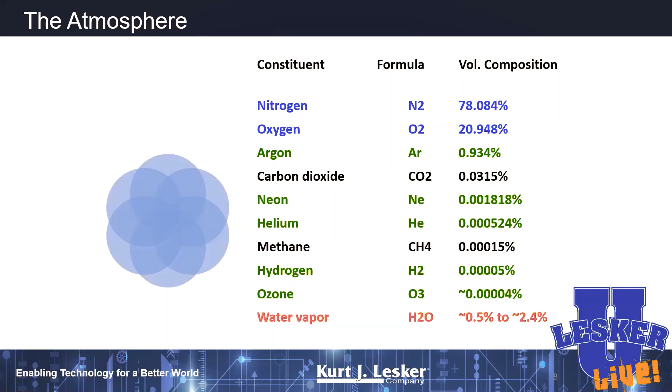These molecules are moving at really high speeds, measured in meters per second. Nitrogen moves around 475 meters per second, helium over 1,000 meters per second, hydrogen on its way to 2,000 meters per second. These things are really flying along. If we had a chance to talk about vacuum pumps, I'd show you how some of your vacuum pumps are specifically designed to match the speeds of some of these pesky molecules.

There's really no negative pressures in our environment. At atmosphere, we've got our 24 quintillion molecules per cc. As we go down in pressure, as our vacuum systems literally claw these molecules out, we go down and down in molecular density. We get down to ultra high vacuum, the edge of it, maybe we still have something like 325,000 molecules per cubic centimeter. You get out to 10 to the minus 12 torr, the lowest possible pressure you can achieve on this planet, and using every heroic means I can describe, you still have something like 32,000 molecules per cc.

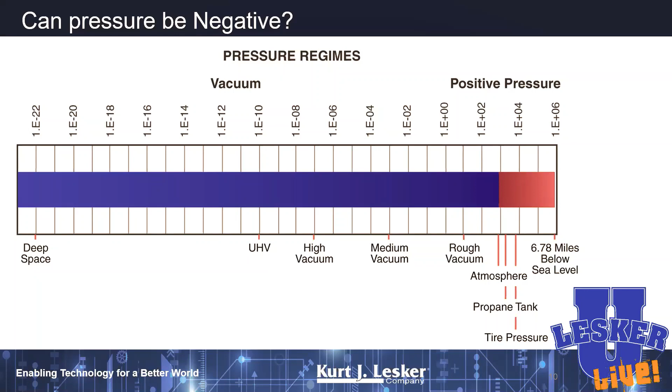Even if you get out into deep space, away from Earth and Mars and planets that are still losing their atmosphere, you still have something like 4 to 5 atoms of hydrogen per cubic meter — not cc's anymore, now we're talking cubic meters. So you still have a few little molecules floating around. Atomic oxygen or atomic hydrogen is pretty aggressive too, so it's a pretty nasty environment out there in deep space.

I just want to take a quick moment to remind you all about this thing called mean free path. When I say mean free path, I mean the average distance that one molecule has to go before it collides with another molecule. So you can imagine up at atmospheric pressure, at 760 torr, when we have our 24 quintillion molecules per cc, that mean free path is a pretty tiny number.

But as we go down in pressure, as our vacuum pumps literally claw these molecules out of the system, we get down to what your dry scroll pumps or maybe your rotary vane pumps will do, and that mean free path starts to open up. Maybe it's a couple of inches.

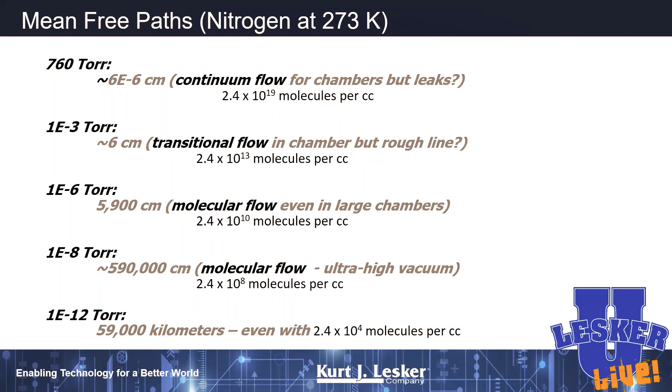We get down into ultra high vacuum, maybe the base pressure we can achieve on this planet using every heroic measure I can describe. These are the pressures that your particle accelerators operate at, and now your mean free path is an enormous number. At those kinds of mean free paths, you've got some right to expect you can take one molecule up to the speed of light and crash it into the path of another molecule without it getting knocked off course.

All right, enough of fundamental vacuum. So when we talk about making films now, again, we're talking about some kind of a technique where we're going to transfer some kind of a solid, typically, into a vapor.

With thermal and e-beam evaporation, we're going to do it with heat. With sputtering, we're going to do it with collisions of ions of some kind of an inert gas like argon, or I'll show you some data on krypton.

We're going to take that vapor, hoping it's going to go across a throw distance and land on a solid surface. We're hoping that once it gets on the solid surface, it's going to start to nucleate into some kind of a structure. A film is going to grow there, and hopefully the film is going to have the properties that we want. And if it doesn't, hopefully there's going to be some kind of a post-deposition process we can do to get you what you need.

There's a blank slide just for notes.

Again, when we talk about these thin film deposition processes, you typically start out with a substrate. The substrate is clean, it's pristine, it's never been touched by human hands. I'm sure none of you have ever touched anything going into a vacuum chamber with your bare hands. That's an absolute no-no. You can never touch anything going into a vacuum chamber with an ungloved hand. One fingerprint has got about the same number of molecules in it as a cc of air at atmosphere.

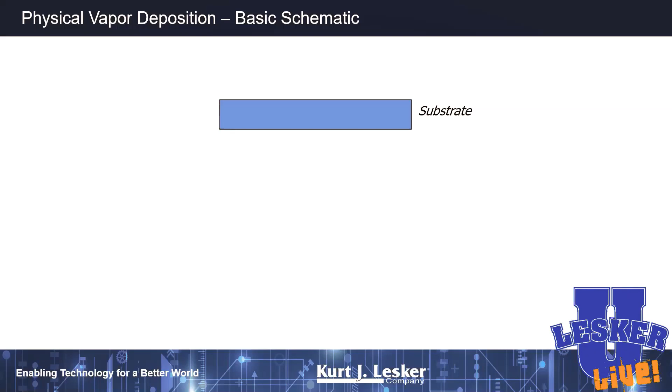All right, so we've got our absolutely clean, pristine substrate. We may want to temperature control the thing, heat it or cool it, depending on what kind of morphology we're trying to develop. As we talk about thin film growth models later on, I'll show you some examples of what we can do if we heat our substrates. When we heat our substrates, we're essentially adding energy to the ad-atoms arriving at our substrate, helping them form a more dense, more smooth film.

We've got some kind of a throw distance between the substrate and our source, and the source can be your evaporation pellets or your sputter target. We're going to develop some kind of a flux from that source. Again, with thermal evaporation, we'll do it with heat. With sputtering, we'll do it with collisions of argon ions, for example, and hopefully we'll get a film, and hopefully that film will have the properties that you want.

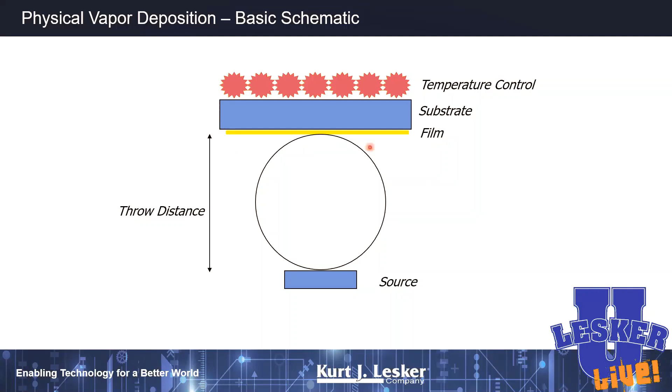And if it doesn't, hopefully there's some post-deposition process that we can do to get your film to do exactly what you need, like stick to your substrate.

You've got to have a vacuum system which is designed correctly, where you can get to the pressures that you need to. It may have load locks if you're trying to get into some ultra high vacuum routinely. You might need to have the right kind of pumps. You may have a process that's sensitive to hydrocarbon pump oil vapors, so you've got to use dry scroll pumps instead of rotary vanes.

Then you've got to have a process that works. You've got to have the right current and voltage combinations. If you're doing thermal evaporation, you've got to be at the right base pressure, and I'll show you how different base pressures will affect the morphology of your film. You've got to be mindful about the chemical purity of your source material.

And then you've got some fundamental parameters, things which are going to be really a function of the type of process that you've chosen to deposit your films. Based on the process, your ad-atoms are going to have a certain amount of energy, which may or may not be sufficient for what you're trying to do. I'll show you some data on flux densities in terms of things like deposition rate—the angle at which these fluxes actually impact your substrate is critical, and you have a little bit of influence over things like that.

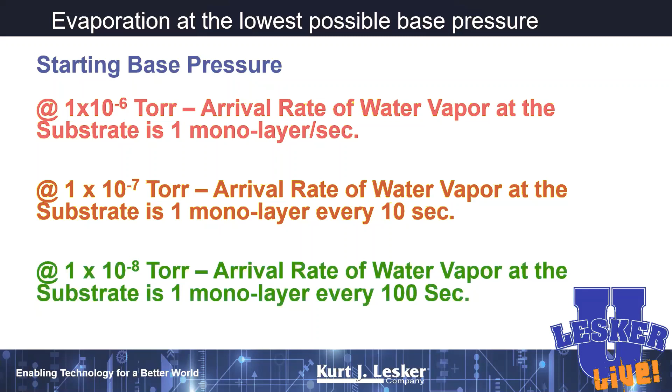Let me show you some examples here. I have one of the great jobs in the world - I get to travel the entire planet and give lectures to wonderful groups like yours. I teach a lot at national labs and military labs, and with a lot of industrial customers, and one of the groups I work with a lot are the groups doing automotive lighting - the people that do headlights and taillights for your cars, buses, and motorcycles. That group should be pretty much interested in reflectivity.

If you do it right, you can get almost 100% reflectivity. But your car people are too cheap to use silver, so they use aluminum. For those of you who've deposited aluminum films, you know it's a horrible material - it just really doesn't want to be aluminum metal. It wants to be aluminum oxide or aluminum nitride. It's just a real pain. So if you've got any extra oxygen in your system, you are immediately going to crush the reflectivity of your aluminum films. You'll go from 85% reflectivity for a pristine film down close to 70% for a film with a lot of oxygen in it.

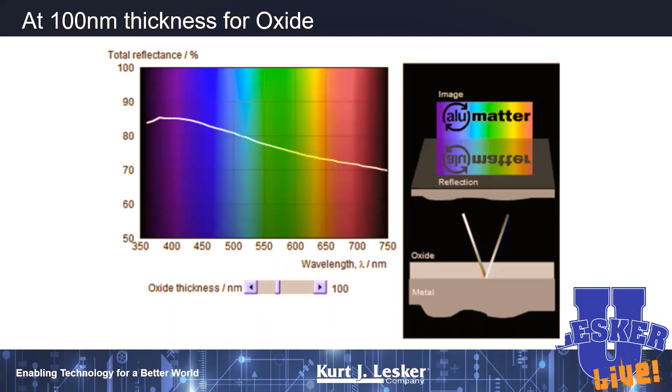Why is that? If you look at what automotive lighting guys do, an automotive lighting manufacturer will make 250,000 pairs of headlights a month. So these guys are really built for speed - they're not built for reflectivity.

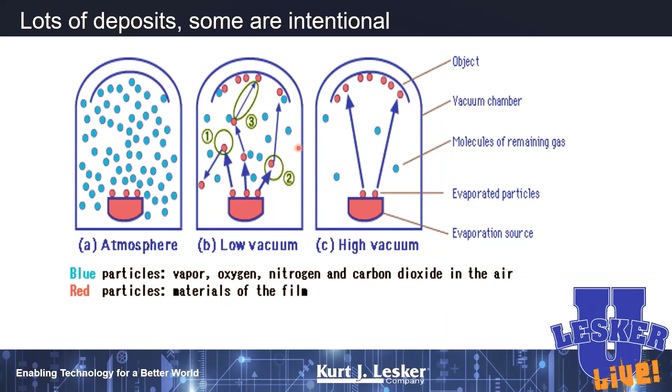Most of your automotive lighting manufacturers are doing their depositions about in here, and that's why a lot of these films are pretty junky.

Here's a really simplified cartoon for a thermal evaporation system - this is about the most simple system you'll work with in your careers. Your material sits down here in a boat or a crucible. There's a power supply, which I'm not showing you, but its parameters are critical - you've got to know the voltage and amperage it can deliver in order to determine what materials you can actually evaporate. Anyway, your materials are down here.

Your substrates are typically up high. Generally speaking, we're going to evaporate up. I'll show you a boat here in a minute where we can evaporate down, but it's fairly complicated. Hopefully your substrate's on some kind of a manipulator so we can actually move it through the vapor plume we're going to develop here.

This chamber can be at the lowest possible pressure that you can achieve. So 10 to the minus 8 torr is not a bad number for a thermal or e-beam evaporation system. You do not need a process gas. The lower in pressure you can get this system, the more pristine the films you're going to make. You'll have fewer gas inclusions, fewer stacking errors and things like that. So again, think clean, pristine, lowest possible pressure you can achieve.

You're typically going to have a quartz crystal microbalance, so you can measure deposition rate in real time, and obviously we're going to want to measure pressure. Because if you want to make two films that are identical, they've got to both be done at the same base pressure. If you don't get to that same pressure, you're going to make really horrible films. Again, I'm not showing you the vacuum system that goes along with this.

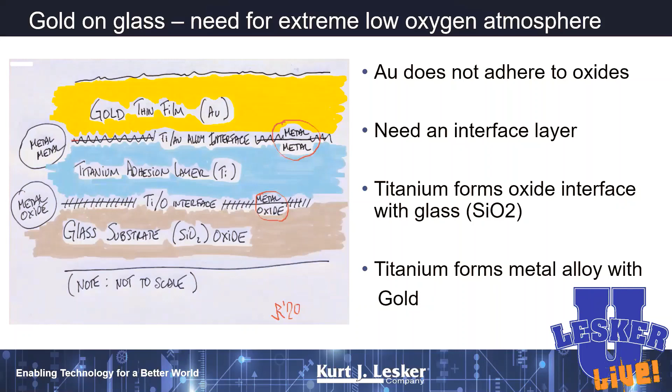Now, if you have to break vacuum and expose your titanium to the atmosphere, you're going to have a titanium oxide layer here, and your gold won't stick to that. So just be really, really mindful when you're trying to put metals on things. Certainly gold does not want to stick to oxides, and so you've got to have a nicely sophisticated system to do that.

When I talk about thermal evaporation or evaporation at all, it's about vaporizing the material. Thermal and e-beam evaporation is really not about melting the material. We're interested in the melting temperature because it's going to have some effect on how the material is going to react with our boats, but we're really not intentionally trying to melt anything if we can get away with it.

And evaporation and sublimation are different. Evaporation we're going to do with heat. Sublimation we can just do with pressure. I'll show you some charts in a couple of seconds where we can just sublime something if we want to make a film out of it.

If you look down inside the system, again, this is a brand new system, so it's clean, it's pristine, it's never been used before. This is a 3-boat system. So we have a boat here, we've got a boat here, we have another boat here. The boats are typically made out of refractory metals like tantalum, tungsten, or molybdenum. There's a little indentation in the center of the boat, and that's where we're going to put our materials to evaporate.

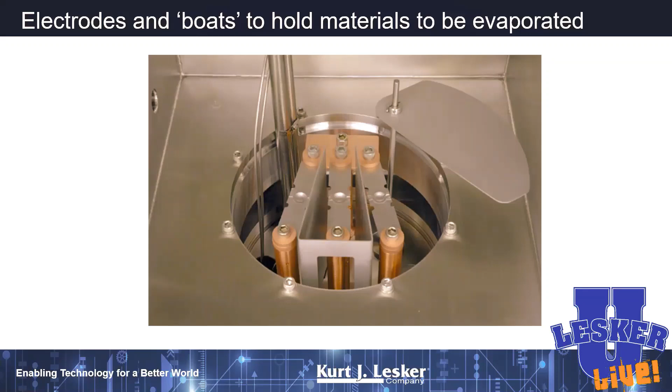This system is set up with a shutter so I can swing it over the top of the boats and preheat my source material, trying to desorb off any water on the material and burn off any fingerprints some incompetent technician left on it before evaporation. This is widely used in industry.

You've got lots of options on thermal evaporation boats, with lots of different geometries to affect the shape of the flux coming off them. As I mentioned before, we have to be really mindful of the voltage and amperage of our power supply, because that completely dictates the suite of materials we can make by thermal evaporation.

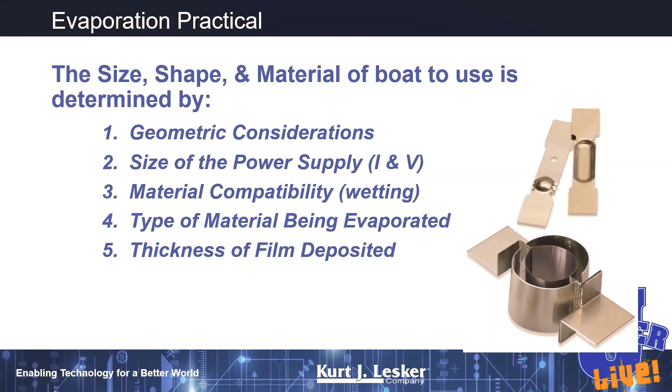We also need to be mindful about compatibility with the boat material for whatever you're evaporating - I'll show some recommendations in a minute - and you need to be mindful of the thickness of the film you're trying to deposit. These boats I showed you are great for relatively thin films, since you can't put much material in them.

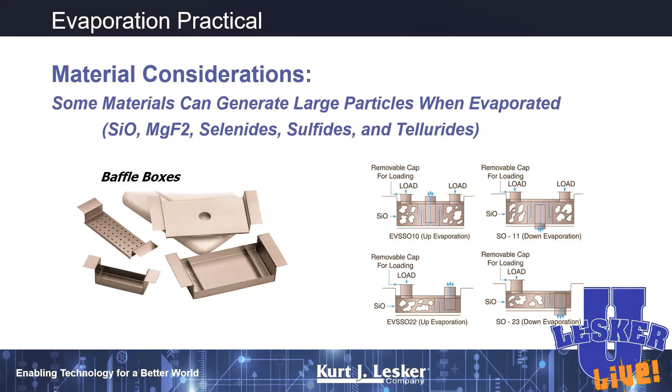You can evaporate from rods by putting coils in there in our systems. If you need to evaporate downward, for example if your substrate needs to be coated below the source material, there are fairly sophisticated boats that evaporate down. If your material spits a lot, you can use a baffle box, where the material sits in a box covered by a shield to mitigate big clumps spitting out at your substrates.

Crucibles can be made of materials like aluminum oxide, silicon dioxide, pyrolytic graphite, metals like tungsten or copper, or boron nitride if you don't want your material to stick very much.

Hang on a second, my dog wants a cookie here. Hang on... all right, there you go. All right, the dog's happy for another few minutes.

Very clever. So again, there's going to be some things that you can do by thermal evaporation here, low temperature stuff, or the boats that I showed you, the tantalum, the molybdenum, the tungsten boats. For other things like refractory metals, if you've got something that goes off at very high temperatures like platinum, tungsten, titanium, things like that, we may be better off doing those by an E-beam. I'll show you some data on that in a second.

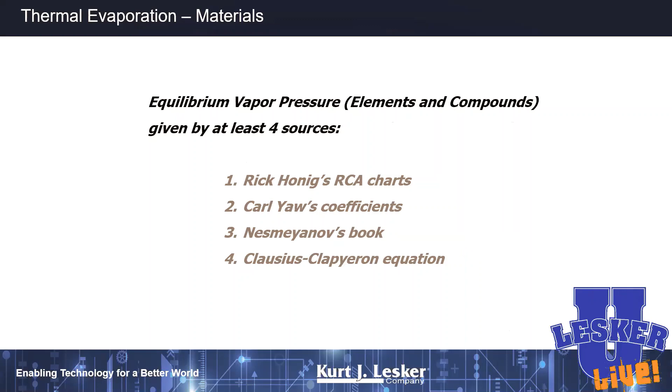Now, if we're trying to get to that number, what temperature do we need to get to that equilibrium vapor pressure we want? I'll show you some of Rick Honig's wonderful charts that he developed when he was at the Radio Corporation of America. There are some other places we can look these things up, and we can actually calculate them using equations if we like to do the math. I'm typically too lazy to do stuff like that. If you just want to look it up, again, these are...

That means the zinc will likely not attack our boats. We won't get some sort of violent reaction between the zinc metal, for example, and our tungsten boat. As I mentioned, typically for thermal and E-beam evaporation, you want a vapor pressure somewhere in the 10 to the minus 2 to 10 to the minus 4 range. Much below 10 to the minus 4, you're not going to be able to read much of a deposition rate on your quartz crystal microbalance. So think about being in this range.

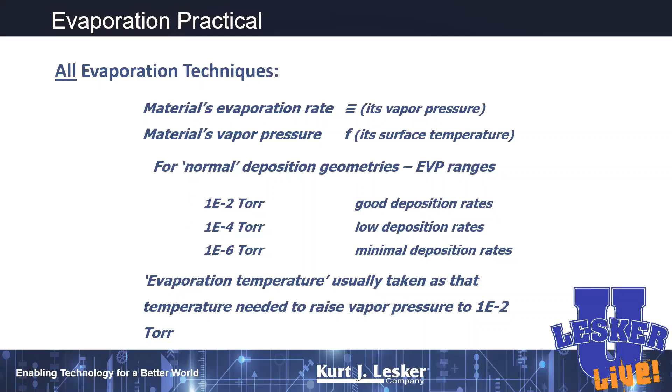So the aluminum is going to be molten. It's going to be very aggressive. It's going to try to drill holes through your boats or your crucibles. Aluminum is just really a nasty material to work with.

We've got a guy on staff named Rob Bellin, and he's a really walking book of useful knowledge on e-beam and thermal evaporation, and he provided me with a couple of tips here for the materials you're working with. In terms of trying to choose a boat to use, Rob's suggesting tungsten and tantalum for things that are going to sublime.

For things that are going to melt, that's just a nightmare. If you've got molten material in your chamber, it's really, really risky. Copper's not such a bad actor for things like that. If you want to deposit gold, palladium, or nickel, there's boats out there coated with a ceramic, aluminum oxide, to try to keep these metals from attacking your boat. If you're trying to do titanium, Rob suggested you just use something cheap, because you're going to be throwing it away about every application.

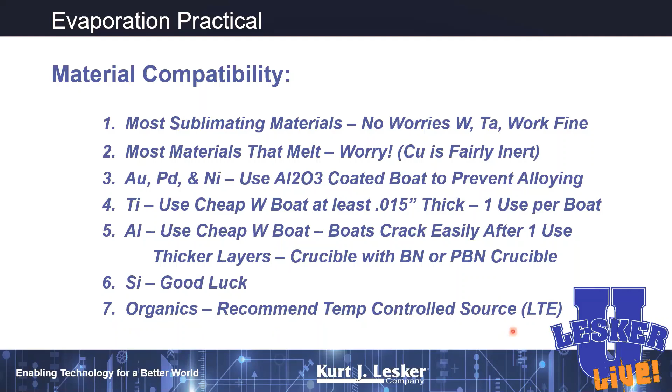Now, we have tried to summarize all this stuff for you. We have a thing called the materials deposition chart, available on our website. If you want a hard copy, let me know, send me an email, or send Nate or one of your contacts at the university an email, and we'll send you either a lab notebook that has this chart in it, or a big wall poster. If you've got a big crack in your wall you're trying to cover up, the wall poster is pretty handy for that. But what we tried to do is take all of the deposition information we have for oxides, nitrides, selenides, sulfides, all this stuff, and put it into one big chart for you.

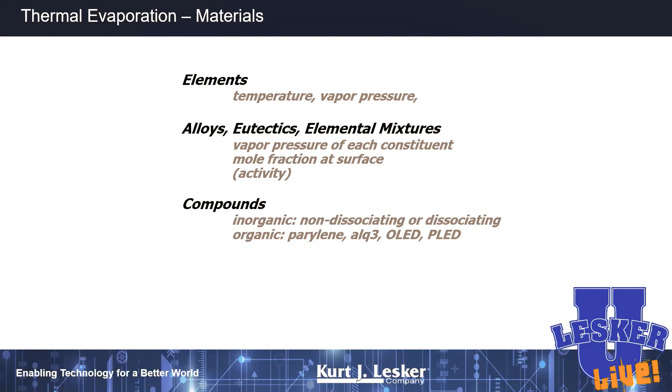I mentioned base pressure—that's just really critical. You've got to know what base pressure your system can get to. The lower in pressure you can go, the more pristine the films are that you're going to make. If you want to make two films that are identical in two different depositions, you've got to be able to get back to that same base pressure every time. So it's really critical that you know the pressure your system can get to, and that you keep your system clean and pristine, and don't ever get in there with your bare hands and leave a fingerprint. A fingerprint can cost you a decade on pressure.

And certainly, if you're working with reactive materials like aluminum or niobium or titanium, if you've got any extra oxygen in your system, you won't form the metal that you want. You'll form some kind of an oxide.

Now, we always recommend that you do some kind of a ramp and soak procedure when you're trying to do a thermal or E-beam evaporation. You've got an initial ramp and soak up to a temperature hot enough that you can desorb all the water and fingerprints and junk off your system. Maybe you do this with your shutters closed, and then a second ramp and soak, maybe with your shutters open, where you're trying to look at your quartz crystal microbalance and see how your deposition rate is increasing, and then a final short ramp up to the desired rate that you need.

Again, you never want to use more power than you need. There's no reason to go to a deposition rate or an equilibrium vapor pressure over 10 to the minus 2 torr. You will not like the morphologies of the films that you get.

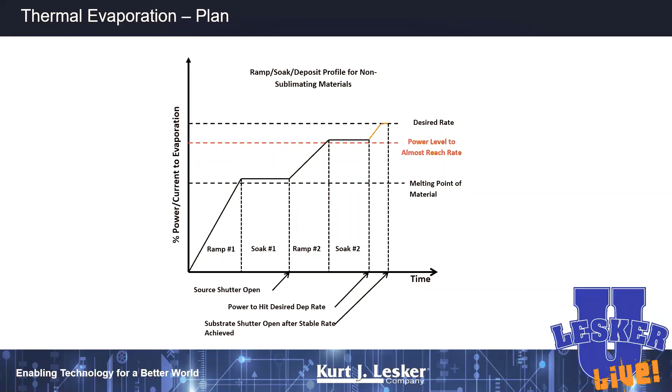We do recommend calibration runs. So if you're starting over with a new boat, or starting over with a new material, you do a calibration run—something onto a microscope slide, not onto your precious substrates—just so you can look for melting temperatures, and look for reactions between the material you're depositing and the boat.

It'll let you set the tooling factor for your quartz crystal microbalance. Again, your quartz crystal microbalance needs to be educated about what material you're using, and by doing a calibration run, you can generate this thing called a tooling factor. I don't have time to go into that just yet, but your quartz crystal microbalance is going to have some kind of a readout on the control panel for your system.

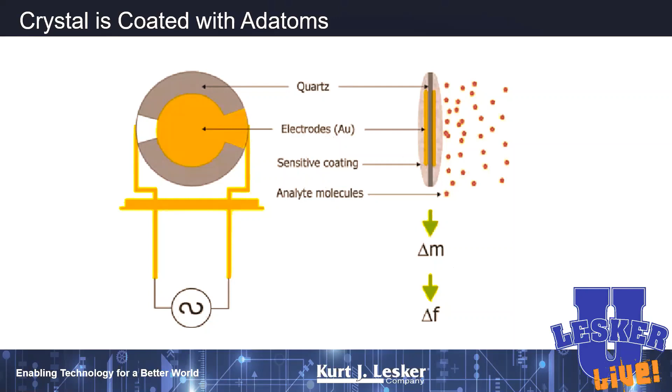The quartz crystal sits down in a water-cooled holder in order to keep that crystal at the same temperature. As you deposit material, the crystal has got a natural vibration that it does, and as you deposit material on it, you're going to change that vibration, change that frequency, and we use that change in frequency as our proxy for deposition rate. As we deposit more material on it, you can see that frequency is going to just drop and drop and drop, and we use that change in frequency as our proxy for deposition on the films.

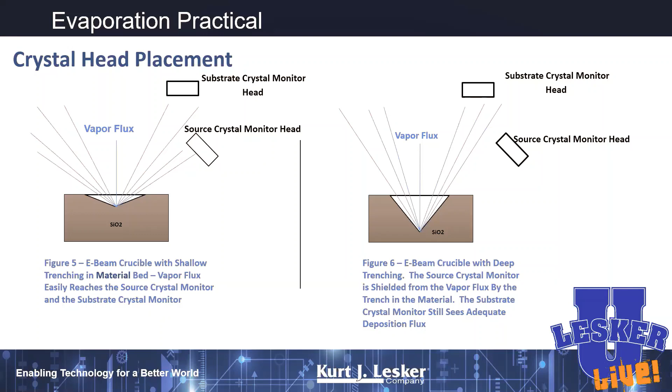Now, I mentioned film thickness. Obviously, before you make a film, you should know how thick the film is that you're trying to make. I love thermal evaporation because it's really the most material efficient technique we have to make a thin film, so that if we know the source to substrate distance, we can use that to calculate the area of a hemisphere, and do some math there to figure out exactly how much material to put in our system.

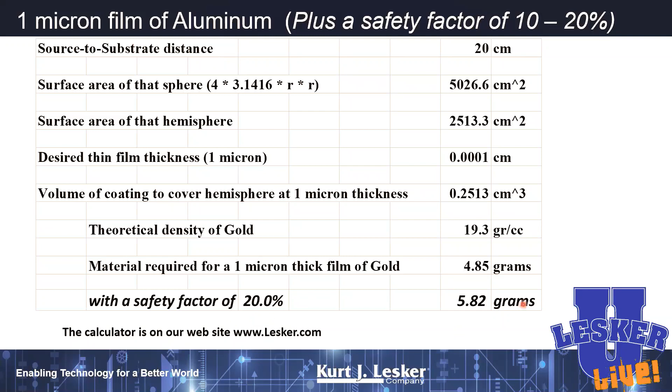So if you go into the website and go to evaporation materials, this calculator will pop up, and it'll let you input the source to substrate distance. You can either tell it you're doing gold, or you can type in the theoretical density of the material if it's not already on our list. And it'll prompt you for a safety factor, so you can go without it if you're feeling pretty courageous, or you can put in 10% or 20%, and it'll actually calculate how many grams you need to do that deposition.

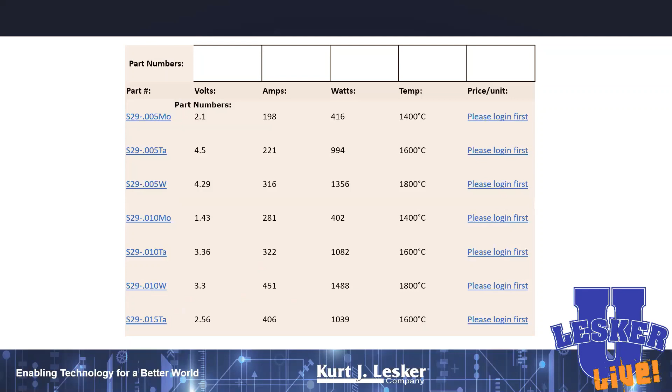Just to wrap up on thermal, again, we're going to use these wonderful refractory metal boats. We can use crucibles if we want to, lots of options there. Generally speaking, we're going to evaporate up. I want you to know the parameters of your power supply so you can know what materials, what temperatures you can get to. In terms of chamber pressure, I want you to go as low as you can possibly go, so I put 10 to the minus 8 torr in there. Hopefully your systems will go to that pressure. But whatever pressure you can go to, make sure you can get to that same number over and over and over again.

The thermal load on your substrates can be high if you're depositing for long periods of time. I'll show you some examples of that in a little bit.

Now let me talk quickly about E-beam evaporation. Most of the comments I made about thermal will apply to E-beam, but there'll be a couple other things I need to point out here. Just know that E-beam evaporation may be one of the more complicated techniques out there that you'll ever use. There's lots of black art going on there. I highly encourage you to send questions to us if you're going to do E-beam for a material that you don't have a process for. We've got lots of experience there.

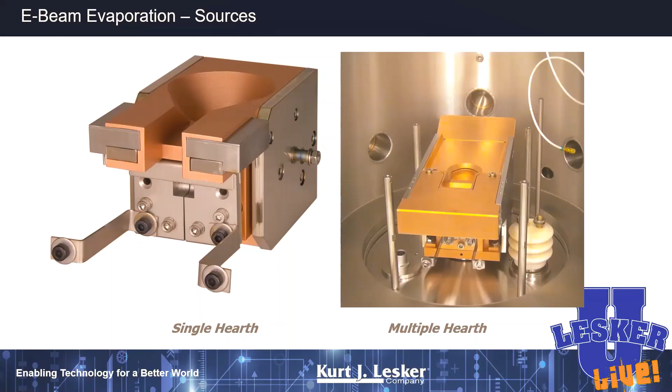Again, used widely in industry. Most of your optical lenses are coated by E-beam deposition with maybe an ion support or an ion assist. Your thermal imaging lenses, things like that, are all done by E-beam evaporation. So getting good at E-beam is definitely a full employment program for everybody.

Now, again, I can't say enough about cleanliness. You've got to keep the chamber clean. You've got to keep your sources clean. You want to try to use high purity materials so you don't have mysterious elemental impurities in there. If you've got questions, get a hold of me or use our tech info service and get you an answer there.

Again, we don't use any heaters in E-beam. We're just going to use the E-beam itself. We use magnets in the gun to bend it 270 degrees.

You can E-beam off the bare hearth. I'm not a huge fan of that, but if you're courageous, you can do that. Or you can pick a crucible.

Typically, if you want to do conductive materials, you've got to use a conductive crucible, like copper or tungsten or pyrolytic graphite. We're going to always E-beam up.

The power supply parameter is a little bit different here. Your evaporation rates are massive, but you don't have much control over it. Again, I want you to go to the lowest possible pressure you can achieve in your system, and you get to the lowest numbers when the system is clean. So please try to keep your systems really, really clean.

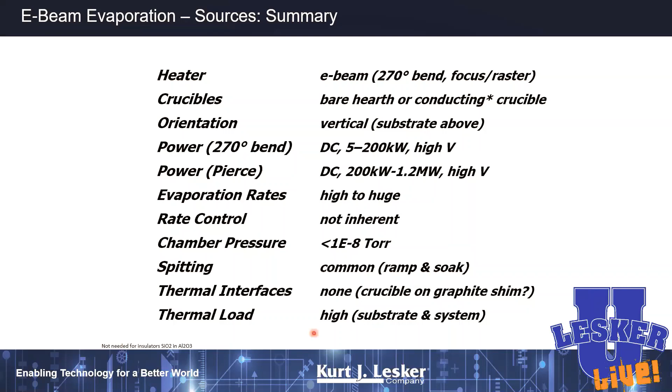If you've got something which does not have great thermal conductivity, like a ceramic, or maybe metal targets made from powders like chrome, you may want to sweep the beam around. If you've got things with better thermal conductivity, like titanium, maybe you don't necessarily need to sweep the beam. But there's lots of black art here, and I would encourage you, if you don't have an existing process, to please engage us or some other expert on how to do this properly.

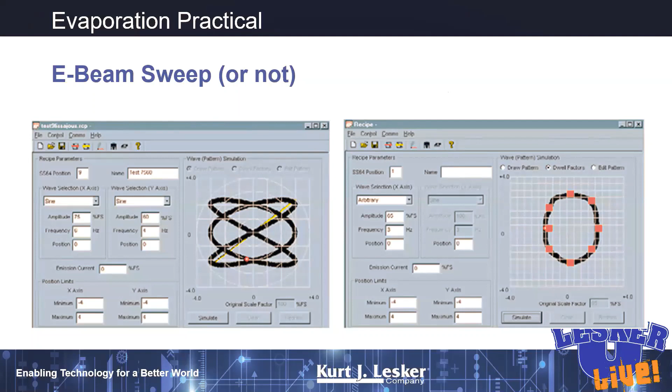Your E-beam sweeps can be really fancy things like this, or they could be spiral shaped patterns. There's all kinds of sweeping you can do. We don't have time to go into the details just yet.

But again, I do want you to pre-melt those metals. So if you start out with pellets, I would prefer that you pre-melt those things into one solid chunk before you actually do your deposition.

Generally speaking, you would like the surface of the material that you're depositing to be pretty flat. If you've got big peaks and valleys there and you're sweeping the beam around, you're going to be changing the shape of your flux pretty frequently.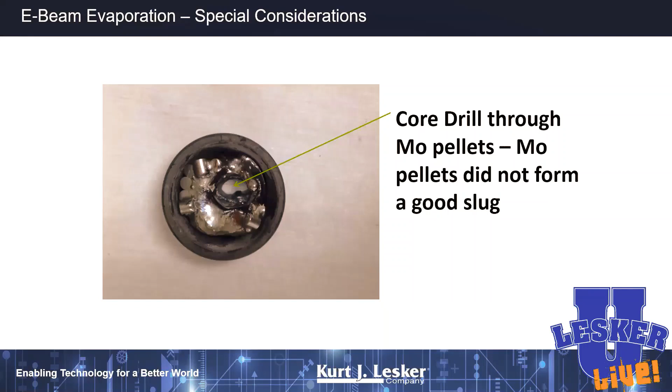And so he E-beamed through the material, E-beamed through the crucible, E-beamed through the copper hearth, and hit the water cooling jacket. When he did that, the E-beam system filled up like a washing machine. That's considered bad. Don't do that. That will really mess with your day.

Other things that go weird on these crucibles - if you're doing things like silicon, silicon tends to grow up out of the crucible in the direction of the beam. I can't tell you right now why it does that, but it does. Very, very crazy.

If you do have a material which has gotten molten in your crucible, after a few cycles, it will crack the crucible. And once it cracks, you'll notice you need more and more power to do your deposition, because some of your metal in the crucible is actually in direct contact with the water cooling jacket.

Don't overfill your crucibles. If you overfill them, let's say more than two-thirds full, as that material gets molten, it will crawl out of the crucible and attack the gun.

That's considered bad. Make sure you don't have any junk laying down in the pocket of your gun. Here's a gun where somebody left a pellet down below, and then when they put their crucible in, obviously the crucible wouldn't sit flat, and they got some very, very strange behavior. So just be mindful of that.

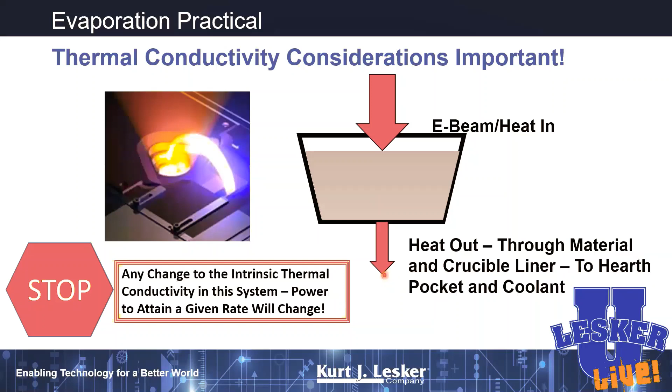Know also, the heat's coming in from your E-beam, and you're hoping that it goes out the crucible for some material. So just be mindful about the heat flows in your E-beam system.

For some materials like platinum, tungsten, and maybe tantalum, you may not want your crucible in direct contact with a water-cooled hearth. So you might put a small washer of graphite down there so the crucible rests on top and isn't directly water cooled. For other things like aluminum, which is so reactive, you do want complete contact with the water-cooled gun so you can keep it cool and it doesn't spit.

Now, I talked about heat load before. These are images from Case Western Reserve University, when they tried to do contact pads on a microscope slide with a plastic mask by E-beam, and made some decent pads. Everything looked great. Then they tried a paper mask, and the heat load was way more than the paper could handle. It outgassed a lot, forming things like silver oxide. The paper warped, so they got maybe no films formed at all, or very horrible resolution. Heating with E-beam is really, really tricky.

So if you're using a paper mask, you've got to be careful. If you're trying to use PMMA, which may have an upper heating temperature of 90 C, or other organic substrates, again, be really mindful with E-beam.

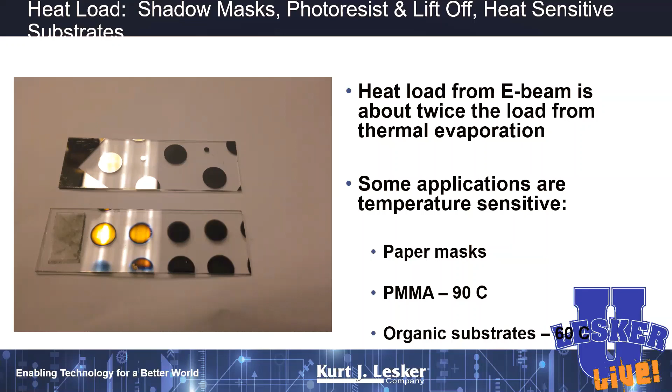Now, there are some things we can do, like increase the throw distance. If you've got enough head height in your E-beam system, maybe you can increase the distance between the source and your substrate. If you can add 3 inches to that throw distance, you can drop the heat transfer load by maybe 30% or so. There are a couple tricks you can do if you've got a heating issue.

Now, I just mentioned these charging effects. If you're trying to deposit an electrically conductive material like tungsten or tantalum, don't put it in an aluminum oxide crucible. If you do, when the crucible charges up, it will start to deflect the beam, so the beam won't hit your source material but will hit the gun instead, and you'll end up depositing the gun. That's considered bad.

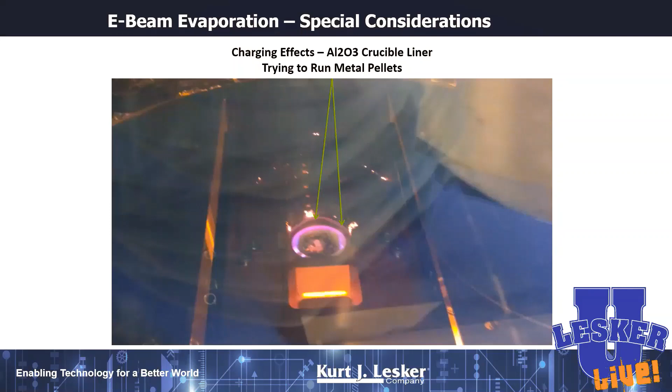To wrap up, E-beam is great for elements. Now we can do anything — all of your wonderful refractory metals, even platinum and things like that. We still have a challenge with mixtures and alloys. You've got to be mindful about the equilibrium vapor pressure and make sure they're matched. If they're not, you're probably going to have to do co-depositions, for example. Really no organics possible here, way too much heat. You've got an issue with things dissociating too. It's really not good for low temperature materials at all.

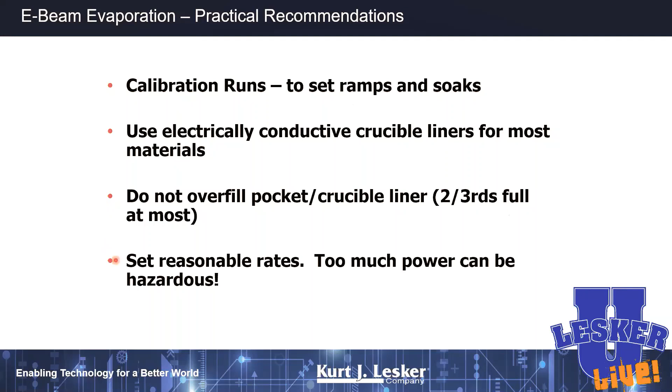I still like calibration runs. I want you to use electrically conductive crucibles for the most part. Don't overfill your pockets, because the material, if it melts, will get out of the crucible. And don't use too much power — if you use more power, it'll ruin your boat sooner.

What else goes wrong? Typically it's related to the filament not being aligned properly — I'll show you an image in a second. Core drilling: if you don't move your beam around, you're likely to core drill through your materials into your crucible. Bad, bad, bad. If you don't keep your multi-pocket gun clean, you're going to have cross-contamination issues. And then there's this charging effect I mentioned — you've got to use electrically conductive crucibles with electrically conductive materials.

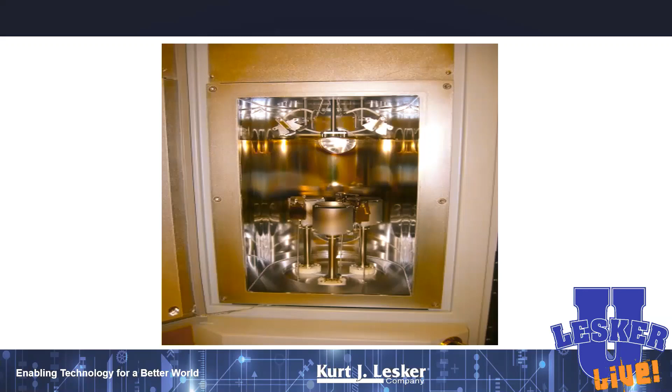Now, this is an older system. Typically, I don't like cathodes being grouped this tightly together. Like I said, with thermal evaporation, everything contaminates everything. So the further apart you can get these things, or if you can get newer cathodes built on tilts where we can tilt them away from each other, you'll have fewer issues with cross-contamination and maybe even easier cleaning. Here's a giant sputter deposition system.

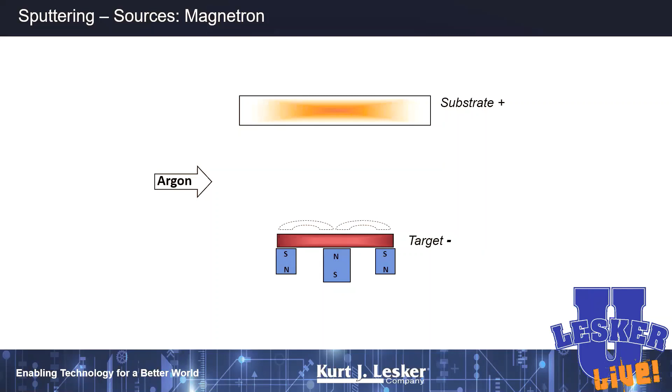So I'm going to introduce a process gas, typically argon, but we can do this with krypton or xenon. I'll show you some data on krypton in a little while. We're going to generate a stream of electrons, and those electrons are going to be captured at the surface of the target by this magnetic field. We're going to use those electrons to ionize some of this argon gas.

Those argon ions are going to crash into the surface of the target and physically eject out target material, which comes out at a bunch of strange different angles. We'll talk about that more in a little bit. Hopefully those atoms then will hit the substrate and form the film that we want, and hopefully that film will have the properties that we want. If it doesn't, hopefully there's some kind of post-deposition process we can do to get the properties we want.

Now a little more detail here. So here's our argon ion that we created from collisions of the electrons we generated with our argon atoms. This argon ion is going to crash into the surface of the target, and based on the energy it has - and we have some control over that energy by how much we bias the target - if everything goes well, that ion crashes into the surface and we eject a sputter target atom or molecule, which goes up and becomes part of our coating.

Now, based on the amount of energy, if we don't have a lot of energy as this ion crashes into the target, it may simply just bounce off the surface and we won't get any sputtering. If the energy of that ion is under 1,000 EV, it's likely to do its job, crash into the target, and physically knock a sputter target atom out. If it's more than 1,000 EV, there's a possibility that argon ion is going to penetrate and embed itself into the body of the target.

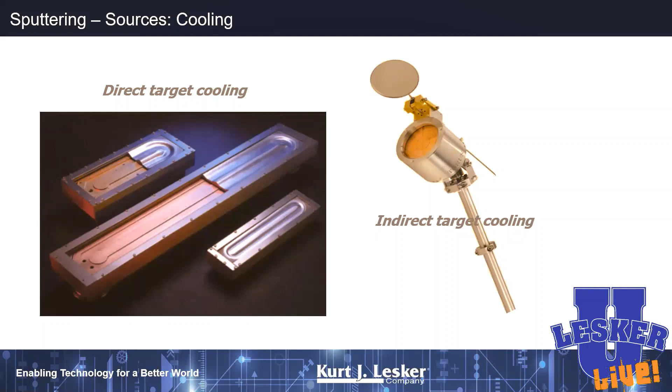So again, sputtering now we're doing all kinds of wild stuff. We're combining things like plasma physics, and we're going to do some chemistry. If we're going to do reactive sputtering, for example, we're going to do material science and even electrical engineering. All of this stuff goes into the sputtering process.

For most cathodes, it's designed to be about 80 thousandths of an inch. Over time, if you've done a lot of aggressive cleaning and things like that, you may have changed the dimensions on that gap, which are going to affect the performance of your gun.

As I mentioned, we've got electrons flowing everywhere. They're going to collide with those argon atoms that we inject into the system and create argon ions. Then as an artifact of that collision, we're going to have some secondary electrons flowing around in the chamber, which we're going to try to capture in the magnetic field at the surface of the target.

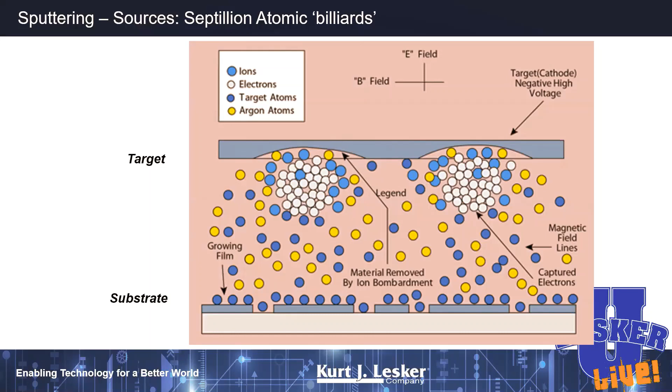As I mentioned, we talked about mean free path earlier. At 10 to the minus 3 torr, your mean free path is on the order of 4 inches. If we go up a decade in pressure, we go down a decade in mean free path, so the film you make at 10 to the minus 2 torr is going to be very different from the film you make at 10 to the minus 3 torr.

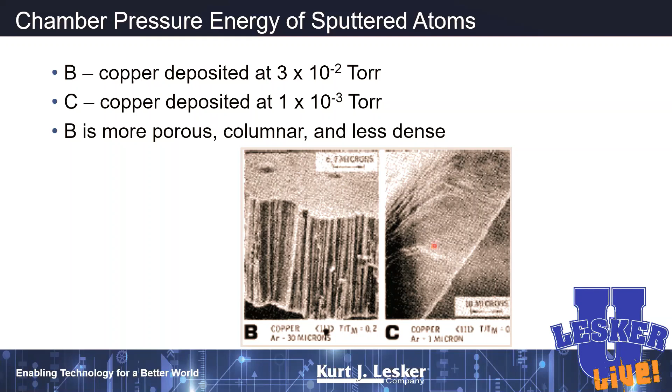Here are some examples, both of copper. Over here we have copper at 10 to the minus 2 torr, and you can see it's very columnar, not very dense—not a great film example. If we go down a decade in pressure, the mean free path increases substantially, and now we make an essentially amorphous, dense film. The arriving atoms have much more energy, so they can move around and fill in spaces to make a great film.

The atoms coming out of our sputter target come off at a lot of crazy angles. You've got to use this cosine rule, discovered or published back in the 1890s, which shows the most probable pathway for an atom leaving your sputter target is normal to the target face, but there are pretty high probabilities for all these other angles too. So with sputtering, we really don't have a whole lot of control over the direction these atoms take as they leave the target and head toward the substrate.

There's a couple other reasons for that. Think back to evaporation—remember, with evaporation we work at the lowest possible pressure we can achieve, so we won't have many tramp molecules. We'll have huge mean free paths, and our atoms will arrive normal to our substrate with nice, pure, clean vectors that won't get knocked off course by tramp gases in the system.

With sputtering, though, we have things coming off the target itself at strange angles, and then we have all that extra process gas in the system where these atoms collide and get even crazier angles coming off our sputter cathode.

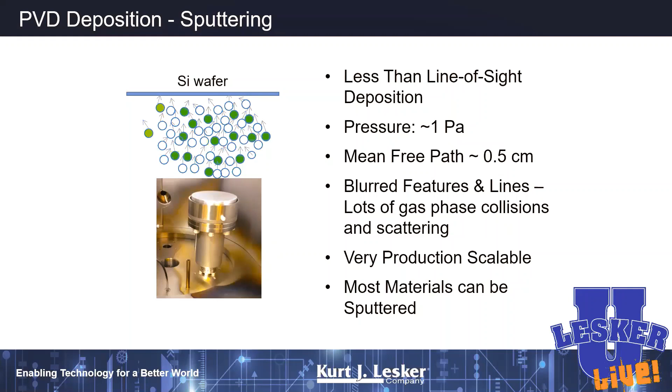If you think about trying to evaporate through a mask, with our incoming atoms coming in normal to the substrate, we can make fairly crisp structures at the surface of the substrate. Whereas with sputtering, where atoms come in at all kinds of rakish angles, we don't get very good resolution with respect to the mask, so we get some pretty fuzzy looking depositions.

Notice also that a lot of your substrate holders are going to have your substrate at some kind of angle relative to these incoming atoms. This is so we can do what's called atomic level peening. If atoms just came in normal to the substrate, generally they'd stick wherever they land and not move around much, so you'd end up with voids in your film. Whereas if atoms come in at an angle, each incoming atom peens—bonks into an existing atom and moves it around a little bit—giving us an improved density in our films.

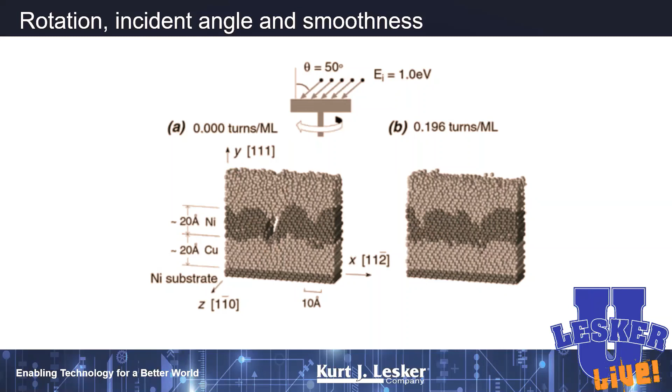Now, we've got magnetic fields involved here. That means we've got a lot of mysterious things going on.

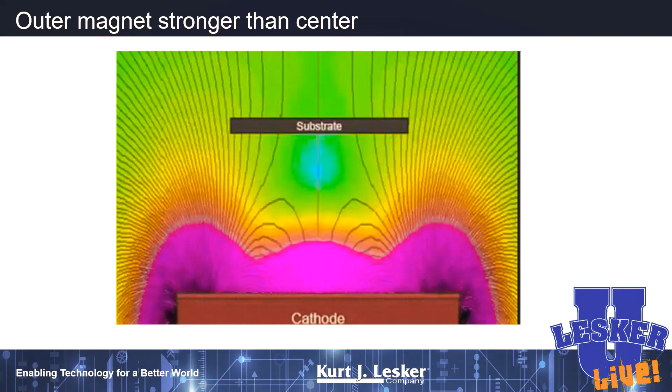Now, I talked about substrate manipulation. Keep in mind that if we had a substrate sitting in a fixed position over the surface of our sputter target, if we look at a property like resistivity, we may see big changes. From the center line of our substrate and target out to the edges, we might see a drop in resistivity here in the sputter track, and as we get out toward the edge, maybe an increase in resistivity. So it's pretty important for a lot of reasons to be able to manipulate your substrate through these plasmas during deposition.

Now, as I mentioned before, we can use electrical biases. We can negatively bias the substrate so it's more attractive to these argon ions, speeding them up and adding more energy to that collision. We can also positively bias our substrates so they're more attractive to these adatoms coming from the target to the substrate itself. So we can use the bias of the substrate, for example, to affect the stresses in the films we deposit.

And so we can use those biases to have our films be under a lot of stress, or we can minimize those biases to be under not much stress. We'll talk more about that in a little bit.

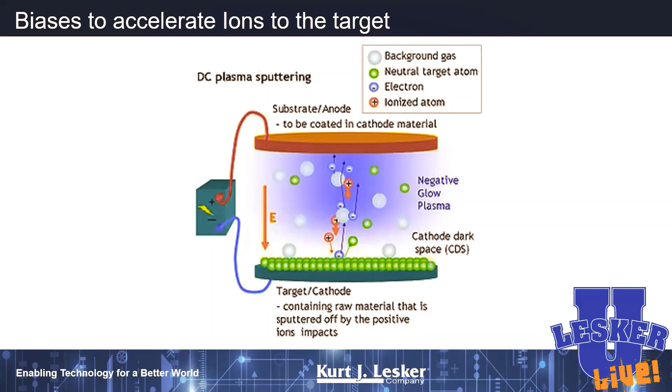We can also do what's called reactive sputtering. Keep in mind that deposition rates for metals are typically much higher than what you get from oxides or nitrides, so if you want high deposition rates and also want to make, let's say, an oxide coating, you can do reactive sputtering.

So I can sputter from, let's say, a titanium metal target or an aluminum metal target. I can introduce my argon process gas, but also add some oxygen into that gas stream, so that my argon ions collide with the target, eject metal atoms or molecules, and those then collide with the oxygen in the system. We do a bit of chemistry, and by the time we get to our substrate, we're actually depositing an oxide.

I make that sound real simple. It's not simple at all. There are lots of levers and knobs to pull so that you get the stoichiometry you want, doing the proper amount of chemistry in the course of injecting a reactive gas into that plasma so you get the stoichiometry of the film you want. Again, lots of tricks to do this.

Just as some examples, I mentioned titanium. If we want to make titanium nitride, we can sputter titanium metal in the presence of argon and nitrogen to make titanium nitride. Similarly, we can do aluminum nitride the same way, or aluminum oxide, where argon is the process gas and we mix in the reactive gas, either nitrogen or oxygen, to make either an oxide or aluminum nitride in this case. We can also do reactive sputtering by radio frequency.

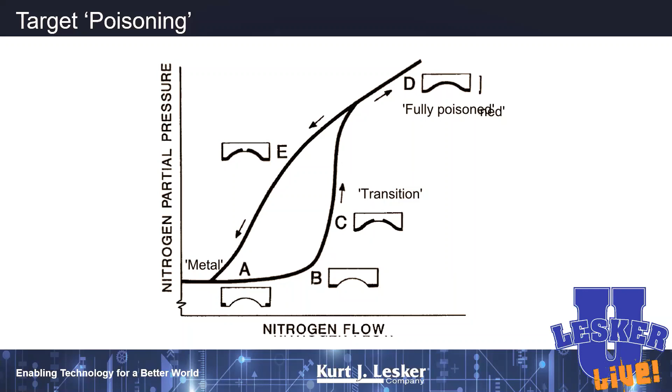Now, I mentioned water earlier. If you're trying to do things like titanium nitride and you've got water in your system, you're really in trouble. Water, unfortunately, is a polar molecule, so it's got a positive side and a negative side, and so it tends to stick pretty well to the walls of your vacuum chamber, to the sides of your cathode.

It's really a pain. You've got to go through some fairly heroic things to get rid of water. And if it gets engaged in the plasma, we're going to crack that water, so then you're going to have things like atomic oxygen and atomic hydrogen in your system. Those are incredibly reactive, and they're going to want to add to your film.

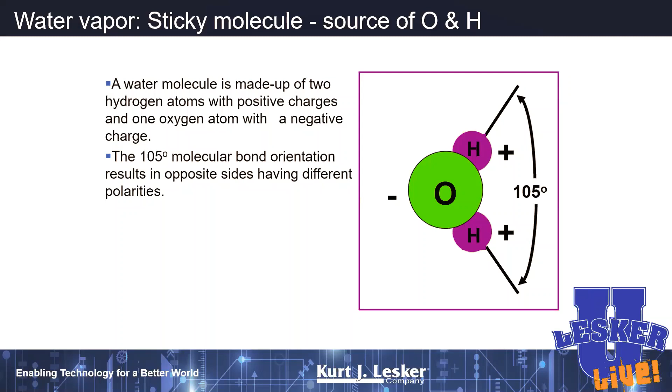So if you're trying to make titanium nitride, for example, and you've got a lot of water in your system, the negative free energy of formation prefers titanium oxide over titanium nitride. So if you have a lot of oxygen or water in your system, you're going to tend to form things like titanium oxynitride. Maybe you'll get a mixture of these things.

So in this case, it really behooves you to try to pump to a very, very low pressure, to pump away as much of that oxygen and water as you can. It also behooves you to keep your chamber closed up and under vacuum when you're not using it, just to try to keep it from getting really wet. You can put hundreds and hundreds of layers of water on the walls of a vacuum chamber without really trying.

Now, as I mentioned with sputtering, we're going to operate at fairly high pressures. That high pressure is going to cause you to have a lot of gas in the system, which is along for the ride. You're going to have a lot of collisions there, so your arriving atoms don't have a lot of energy to form a nice dense film, and your deposition rates are going to be pretty horrible, maybe less than 100 angstroms a minute.

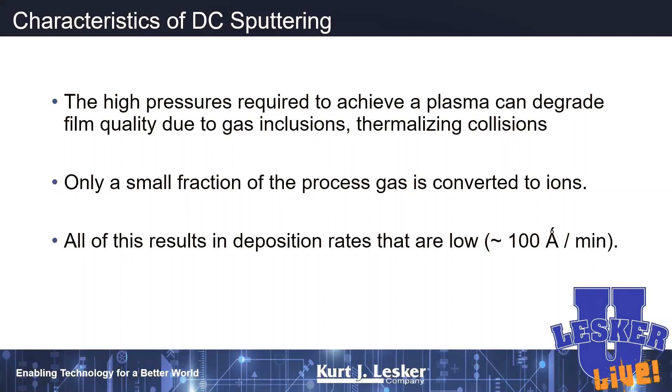I just want to make a distinction between sputtering rate and deposition rate. Typically, when you talk about a sputtering rate, you're talking about the rate at which we're removing material from the target. A deposition rate is the rate at which material is landing on your substrate. Unfortunately, a lot of authors use these two terms interchangeably, and they're not the same thing. So just be mindful of that when you're doing your reading.

As I mentioned, as we interject process gas into our system, only a tiny, tiny fraction of it actually gets ionized. And that's why we have to work at these really high pressures, because we're only able to ionize just a tiny amount of that process gas.

So if we want to think about a thing called the sputter yield, if we want to look at the ratio of the number of ions that actually hit the target and the number of target atoms that get released from the target, that's a function of the mass of the material that we're sputtering, the mass of the incoming ion - typically we're going to use argon, but I'll show you some data on krypton. It's a function of this bias voltage that we use to accelerate the ion to the face of the target itself, and it's a function of the ion's incident angle on the target.

Again, your bias voltage will affect that a little bit, where high bias voltages tend to have the argon ion come in normal to the substrate, but normal to the substrate is really not necessarily great for sputtering. You want a little bit of an angle there.

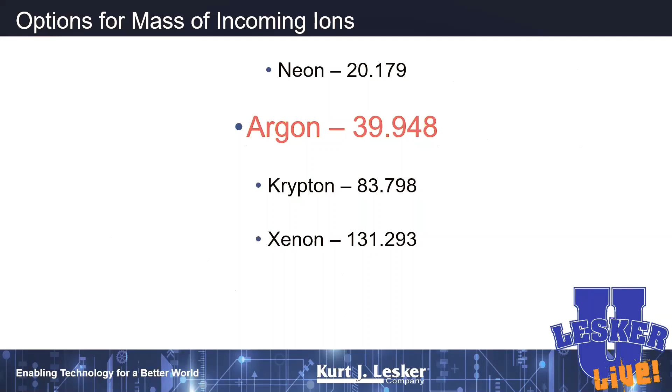This thing called sputter yield is a function of the mass of the incoming ion. Typically we're going to use argon, which has got an atomic mass of around 40, but I'll show you some data on krypton too. So if you're not happy with your sputter yield, we can play around with which of these process gases we use and change that yield.

Now, I don't know how many of you have bought krypton, but the last time I bought a bottle of krypton, about 2,800 cubic feet went for about $8,000. That's much more expensive than argon, so if you really need it, you better have a budget for it.

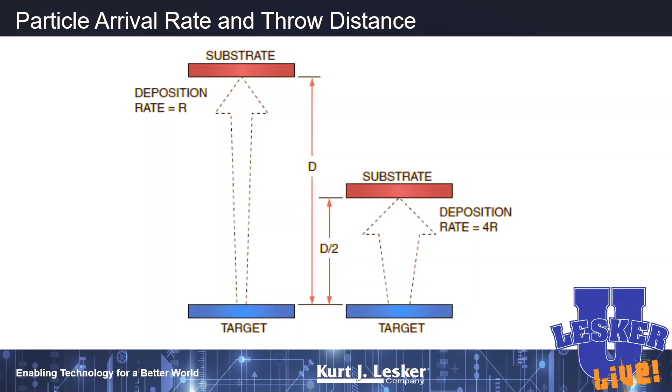Now, if you're dialed into throw or deposition rate, the other thing you can do is increase the size of your cathode. So if we go from a 1 inch to a 2 inch to a 3 inch to a 4 inch cathode, we can dramatically increase the number of atoms we're throwing at any given substrate per unit of time, and that will increase your deposition rate. It's a little expensive way to go.

We can also increase the number of cathodes. So if you really have to have a higher deposition rate, instead of sputtering from 1 cathode, you can add 2 or 3 cathodes, and point them all at your substrate, and you can increase your deposition rate that way. Again, these are all tricks you can use to increase deposition rate.

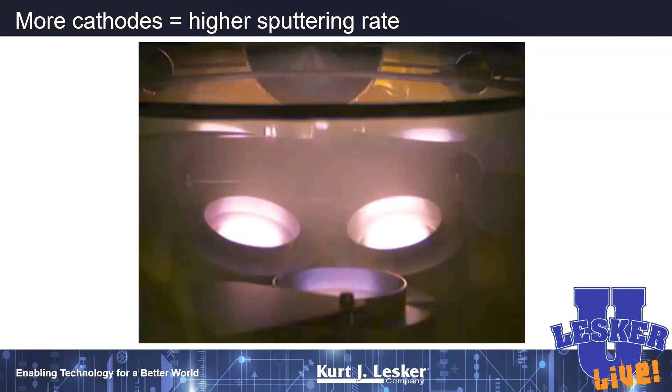Let me talk for a minute about power supplies. Everything I've talked about so far has been what we call DC, or direct current magnetron sputtering, where we're giving our target a continuous negative voltage - same number, same voltage all the time during the deposition process.

If we want to sputter something a little less conductive, like zinc oxide, or maybe transparent conductive oxides like indium tin oxide, we can graduate to a thing called pulsed DC. In this case, we give our target a negative pulse, and then a little bit of a positive pulse in order to relieve any positive ions that may have become embedded in our weakly conductive target. This is also pretty handy for reactive sputtering - the positive pulse tends to clean away some of the redeposition of, let's say, a nitride material that might be showing up on our titanium metal target.

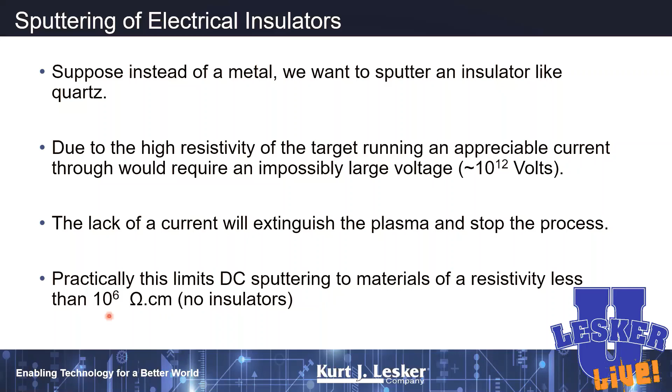So if I've got a true insulator, something with a resistivity more than 1 million ohm centimeters, I've got to graduate to a thing called radio frequency sputtering.

But now we only have about half of the performance that we had with pulse DC. So now we're able to sputter insulators, but the deposition rate now is sort of like half of what we would have seen from a metal.

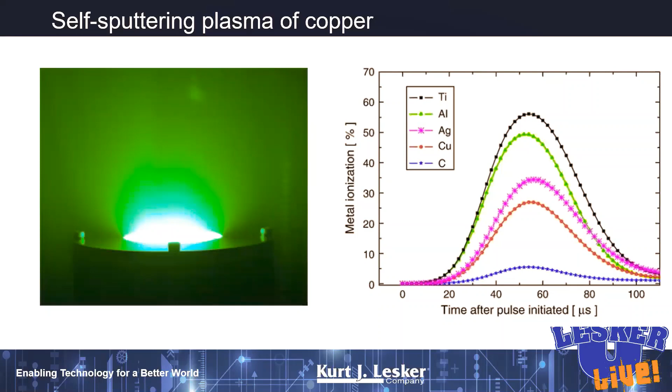If we look at metal ionization, again this is a fairly old view graph, but lots of metals do it. Unfortunately, they have to be electrically conductive. HiPIMS has not been demonstrated with insulators, but you can see that things like titanium, aluminum, copper have very high target ionization potentials, much higher than what you see with magnetron sputtering.

Again, I'm not saying that HiPIMS is the answer for everything. I'm just saying it's another arrow in your quiver, another tool that you can use when you think about trying to deposit some of these materials.

Oh, I've screwed up now. Hang on. Okay.

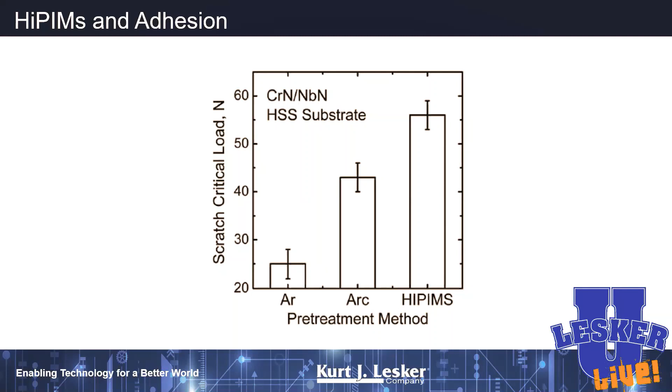If we look at other film properties, like scratch resistance, remember that cathodic arc has been the gold standard for scratch resistant films. So when you think about gun barrels, hip implants, things that have to be amazingly scratch resistant, cathodic arc had been the gold standard. But now HiPIMS has demonstrated much improved scratch resistance over cathodic arc, because again these arriving atoms are much more energetic. They form really nice, dense films, and they're actually a lot smoother than what you would see with cathodic arc.

Generally with sputtering, I recommend that you pre-sputter your targets first. If you pre-sputter them with the shutters closed in your system, you can sputter away the water that's built up on the surface of the target. The target should arrive to you from the manufacturer clean and pristine, ready to go. But as soon as you take it out of the package, you're going to have water and things like that deposit on it. If your technician is pretty clumsy and has handled it with their hands, you're going to have fingerprints on it.

So again, pre-sputtering you want to do. As you pre-sputter, you want to monitor the voltage of your power supply. It'll start out pretty erratic, but when it stabilizes and comes to a constant number, then you're ready to go. Again, with sputter targets, remember, you've got to really keep things cool.

With thermal and E-beam, we were heating things. With sputtering, we've got to keep everything cool. So you've got to be mindful of the power input. Not much of the power actually goes to sputtering—a lot of it goes to heat.

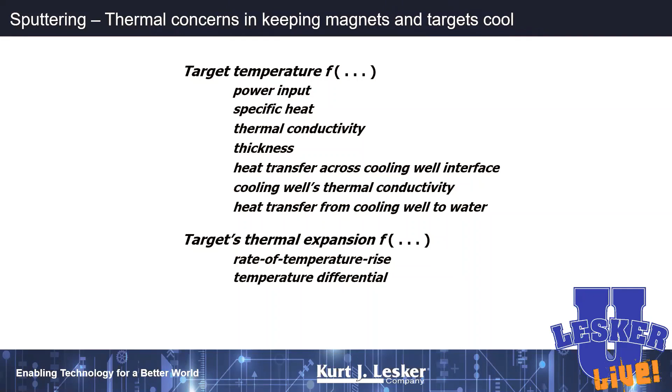You need to think about the thermal conductivity of your target. Again, thicker targets are harder to cool than thinner targets. You've got to think about the cooling and whether you've got good thermal connections to the target itself. If you think about the target's thermal expansion as it gets hot, it's going to grow, and if it fits tightly into your cathode, that expansion may cause the thing to crack.

Again, only about 1% of the energy that we dump into the target itself actually goes to sputtering. Most of it goes to heat. If you look at things like copper, more than 90% of what you dump into that target goes to heat.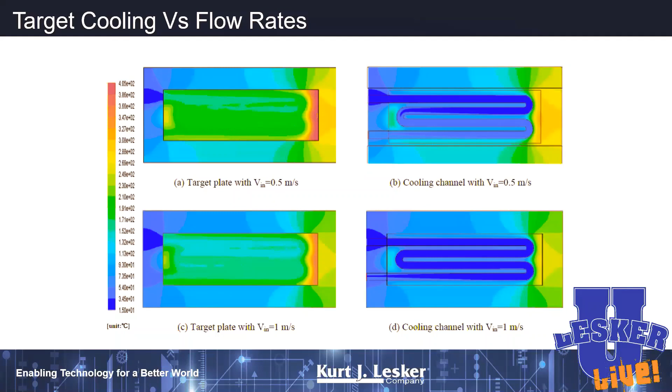So again, we can mitigate that a little bit with flow. Maybe you can have some control over your chillers so you can flow more liquid in there. But again, you've got to mitigate heat. If your target gets too hot, it's going to explode. If it's bonded to a copper backing plate, you're going to melt it off the backing plate. You might even disassociate the material.

This is indium tin oxide, and you can see this got so hot that we actually disassociated the indium tin oxide. We've got indium oxide out here, and then lots of cracking.

Now, it doesn't mean your targets are always going to be beautiful. Here's a bunch of targets which have run successfully—they made great films, but over time they had lots of redeposition, lots of cracking and things like that. So you just have to go in and clean this stuff off. It looks horrible, but actually these targets are in pretty good shape. They just need to be cleaned.

You'll notice that your dark space shield here has got a lot of accumulation on it. You want to clean that off before it actually flakes off and maybe shorts out the gun.

Okay, I'm running out of time, but let me talk just for a few minutes about thin film growth models. Hopefully Nate will let me run over just a little bit. So when we talk about thin film growth models, again...

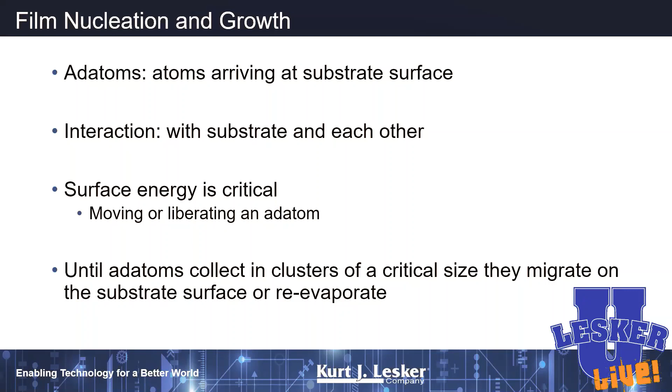Again, energy is critical. We'll talk about ways to get energy into these atoms so we can form nice films. Now, as an atom arrives at the substrate, unfortunately, the first thing it's most likely to do is to bounce off. The sticking coefficients for these things are not particularly great. But if an atom lands on the substrate and does stick, we're hoping it's got enough energy that it can move around and find a friend, find another atom, and start to form either a monolayer or a cluster.

Now, typically speaking, most of these arriving atoms are more attracted to each other than they are to the substrate, and so they're going to tend to form clusters. Over time, these clusters will grow in size and hopefully integrate with each other.

So again, we talked about the mobility of these adatoms. It's really, really critical when these films form. And we can affect that with things like heat. So maybe we want to heat our substrate up so that we can add some energy as it hits the substrate.

We may want to use an ion assist. So we may want to add an ion gun to your system and send some more ions from that gun directly at the substrate to try to bombard these things.

In a perfect world, we would love to engineer some kind of a chemical reaction of these adatoms with the substrate. If you look at processes like atomic layer deposition, that's specifically designed where you physically engineer a chemical reaction between these adatoms and the substrate. In those cases, you get the best adhesion, the best bonds. It's really wonderful if you can do it.

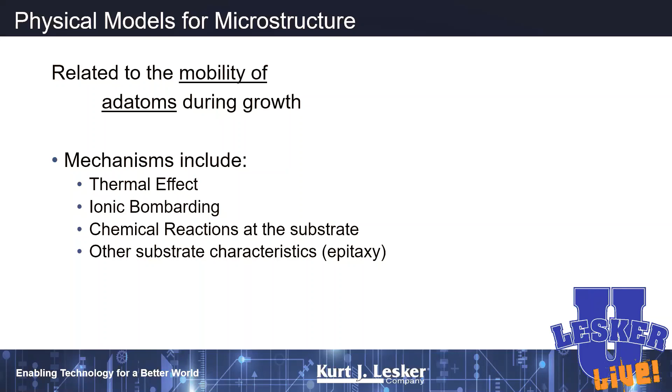If you do an internet search on thin film growth models, you'll always see these three: the Frank-van der Merwe model, the Island growth model or Volmer-Weber, and the Stranski-Krastanov model. The van der Merwe model is a bit naive in that it says we form a monolayer, and the next adatoms form another monolayer, with each subsequent arriving adatom finding a vacancy and filling in that monolayer. This almost never happens, even in atomic layer deposition.

Typically what you're always going to see is what's called island growth, where these adatoms are more attracted to each other than they are to the substrate. So they tend to form clusters, lots and lots of clusters over time, and eventually those clusters grow into each other and we get a continuous film.

Now you do have some rare occasions, in the Stranski model, where in the first couple monolayers the adatoms are very attracted to the substrate, but as we get away from the substrate that attraction drops off and we start forming clusters. I don't want to spend too much time on this, but mostly what you're going to see when doing these films are Volmer-Weber models.

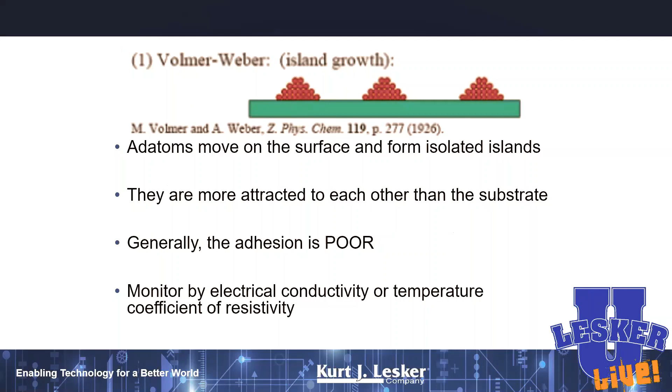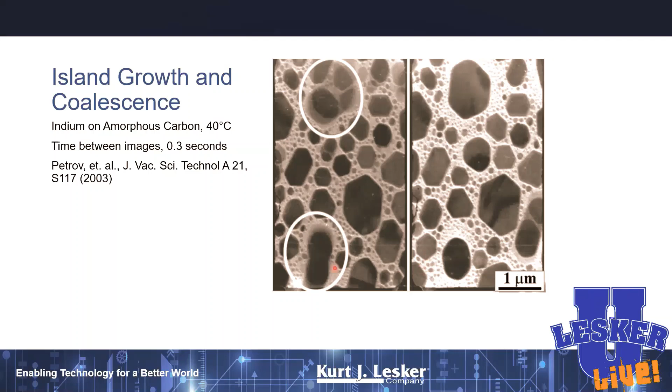If you look at just two different clusters over time, you can see that as subsequent adatoms arrive, they tend to join those clusters together, and then eventually you get larger and larger clusters.

The Stranski method is also very interesting. It just means you've got lots of attraction at the initial one or two monolayers, and eventually that attraction drops off and you form clusters.

As I mentioned, we can also affect this with heat. If we're depositing onto a relatively cool substrate, we get lots and lots of small clusters. As we increase the heat on those clusters or on the substrate, we can reduce the number of clusters or make them larger.

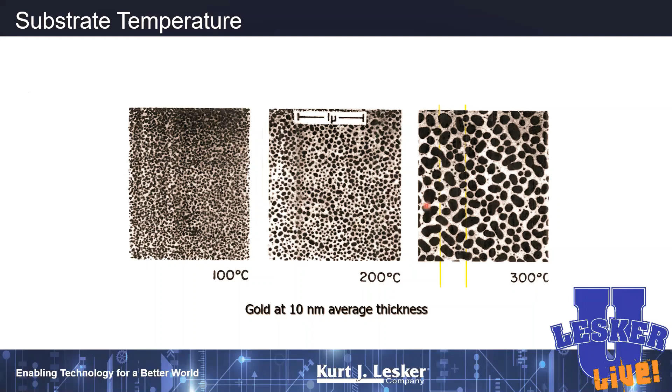We can also do some post-deposition substrate heating sometimes to take a porous film and make it more dense. We can also use epitaxy, matching the characteristics of the substrate with the film we're depositing. We did this a lot in high temperature superconductivity.

Most of you are not old enough to remember what that is, but a lot of great work went on at Northwestern in high temperature superconductivity. In that case, we would use things like single crystal magnesium oxide substrates, which were lattice matched to the yttrium barium copper oxide films we were depositing. With that lattice matching, we grew these beautiful C-axis oriented films.

In a polycrystalline film that's not oriented, we would get critical current densities of maybe 100 amps per square centimeter of cross section. If we could grow beautiful C-axis oriented films, we had current densities here which were 10 million amps per square centimeter of cross section.

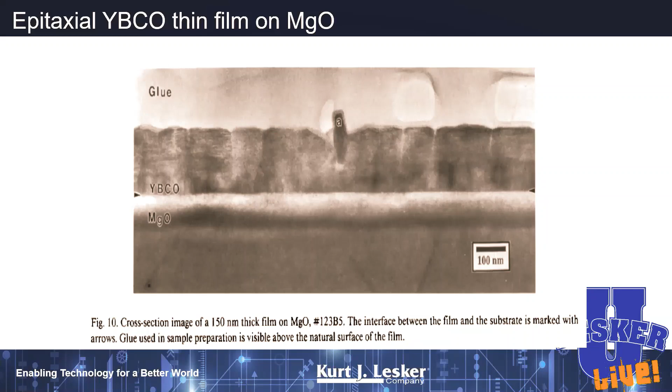So grain orientation matters. Back in the 60s, there was a real cry from the semiconductor industry for people to come up with predictive models of process parameters that you can control, that would then affect the morphology of the films that we grew.

You could use things like substrate temperature, pressure in the system, bias voltages, the ratio of the substrate temperature to the melting temperature of the material you're depositing, deposition rate, angle of incidence. There's all kinds of things we could affect, and by playing around with those, we could change the morphology of the films we develop.

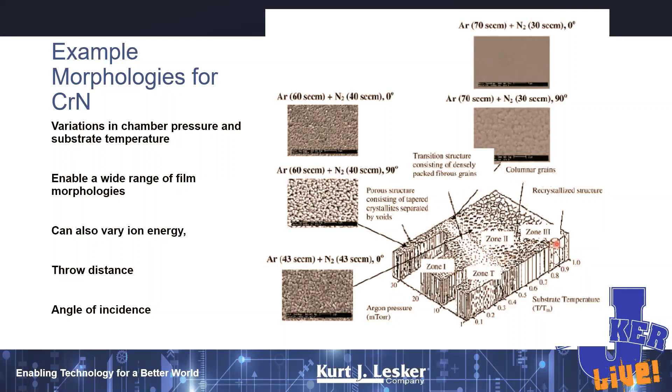Notice that there are zones here - zone 1, zone 2, zone 3, zone T - and those zones have particular grain structures. We can get these different grain structures by varying the substrate temperature relative to the melting temperature of the material, and all of this has been worked out for you.

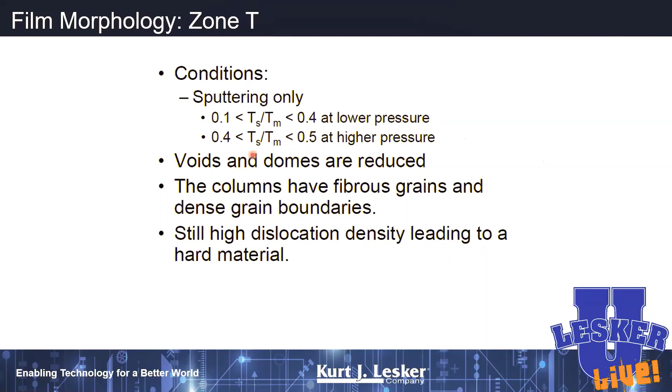So if you want a particular morphology, like the morphology of zone T, we've got coaching for you on what that substrate temperature wants to be. It's been worked out for all of these various zones, and obviously the temperatures for silver are different than for nickel or titanium. We don't have time to talk about each individual zone, but just know there's a lot of work already published to help you affect the morphology of your films.

Consider things like stresses. You may want your film in compressive stress - if you're trying to measure it, the film is going to be bowed up towards you. Or you may want tensile stress, in which case the film's going to be bowed away from you, and it might have a surface that looks like the desert after a rainstorm, with big cracked areas.

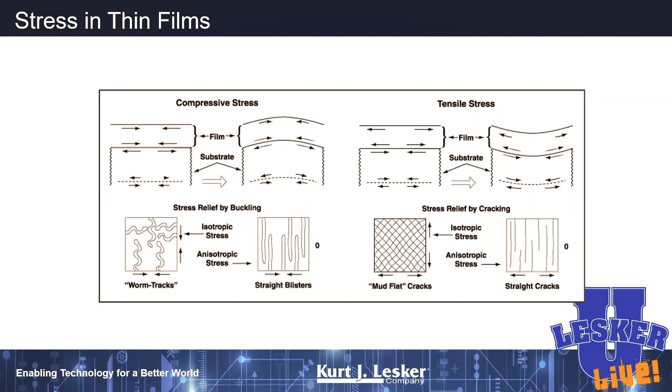Your processes may have intrinsic stresses - thermal stresses caused by the mismatch of the coefficient of thermal expansion with the substrate itself. You may also have process-based stresses, where low pressure processes differ from high pressure processes in the stresses they impart to films. If we go back to that structure zone model with chamber pressure and substrate temperature, I can generate a variety of stresses in my films by varying these parameters.

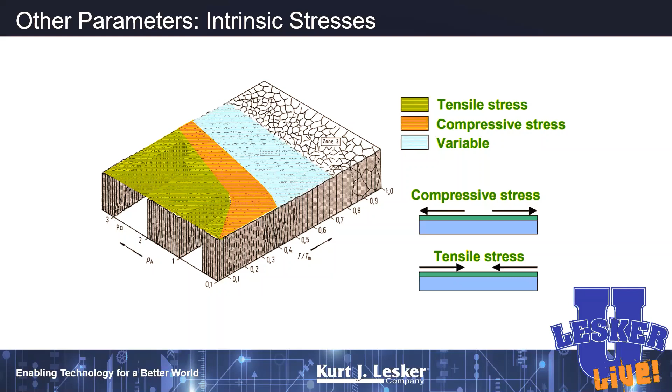Looking just at pressure, films done at relatively low pressures tend to be in compressive stress - think about sputtering - whereas films done at high pressures tend to be in tensile stress, like thermal evaporation.